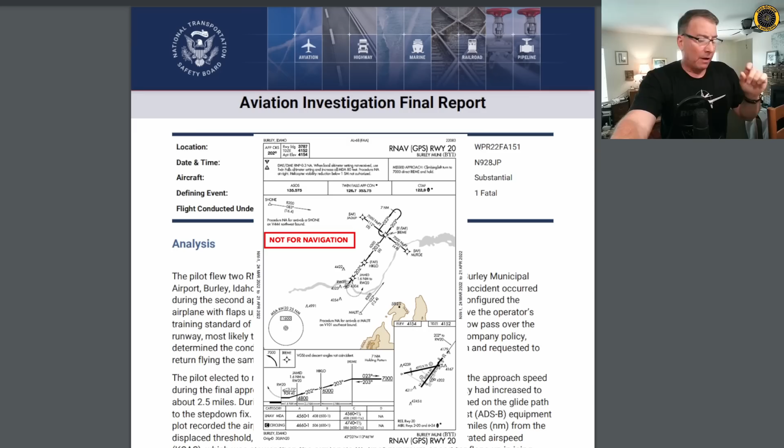The NTSB final report is out on the accident that killed Brittany Infinger, the solo pilot on board her cargo Cessna 208 Caravan aircraft, while attempting the visual portion of the RNAV 20 instrument approach into runway 20 at Burley, Idaho. The accident occurred on short final to runway 20 across the Snake River in Heyburn, Idaho, where Brittany impacted one of the stacks located here on top of the Gem State processing plant, just some 2,600 feet short of the displaced threshold on runway 20.

As viewed from the final approach, these stacks are located directly on final to runway 20, and the agglomerator stack that Brittany hit is located right here. These stacks emit huge plumes of very hot steam throughout the day while processing potatoes.

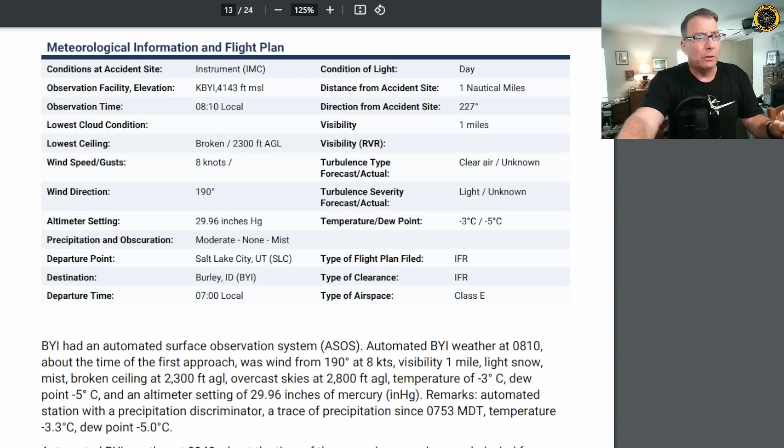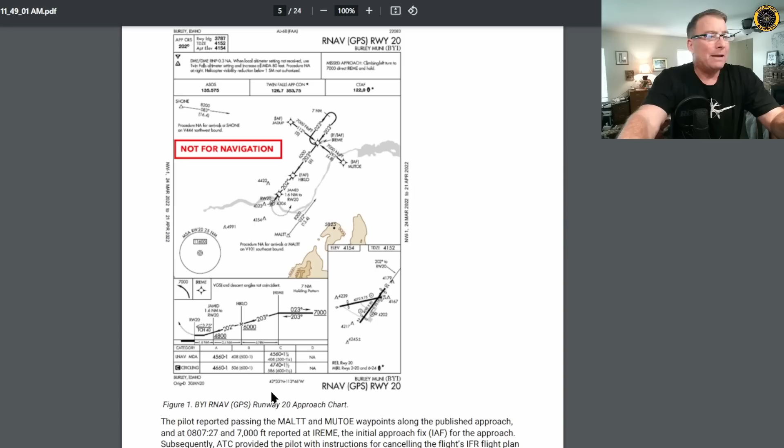At the time of the accident, the ASOS at Burley reported the winds 210 at 8, pretty much right down the runway. Visibility had improved from 1 mile to 2.5 miles of visibility, light snow with a broken ceiling at 3,000 feet AGL. A temperature dew point spread of only 3 degrees. The RNAV 20 instrument approach procedure has a required minimum weather of just 1 mile visibility for the category of Brittany's aircraft and an LNAV MDA, minimum descent altitude, of 4,560 feet.

Surveillance video of the crash indicates the light snowing conditions and the steam billowing heavily out of the stacks located just forward of Brittany's line of sight of runway 20. And it appears that Brittany pops out of the bottom of the steam cloud in a nose-high, flaps-up condition and is attempting to power up and out of the situation that she's in.

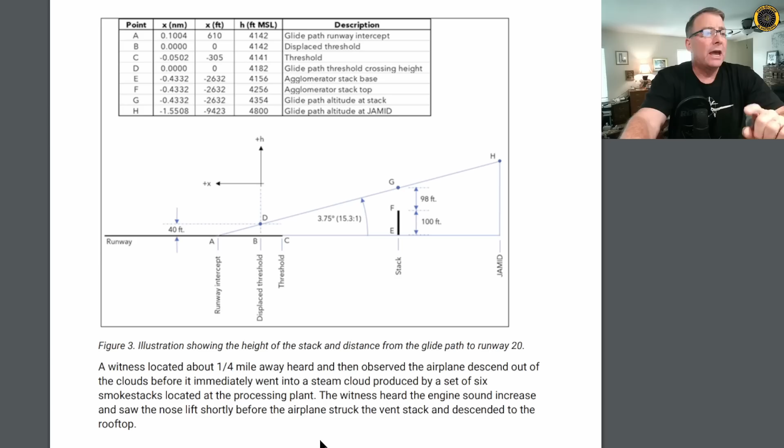A witness located about 1/4 mile away heard and then observed the airplane descend out of the clouds before it immediately went into a steam cloud produced by a set of 6 smokestacks located at the processing plant. The witness heard the engine sound increase and saw the nose lift shortly before the airplane struck the vent stack and descended to the rooftop.

An eyewitness video taken shortly after the crash shows the weather conditions and the conditions of the steam at the time, with the steam still billowing out of the 6 stacks proceeding downwind, and in this video, even obscuring the tower that Brittany hit.

The aircraft was a 2013 Cessna 208B with 5,116 hours. This was a Part 135 cargo flight, registered owner Spirit Air, operator Gem Air LLC, November 928 Juliet Papa. With the certified max gross weight of 8,785 pounds, powered by the PT-6A, the NTSB found that the aircraft cargo load was within limits, both within the center of gravity limits and within the weight limits for the aircraft.

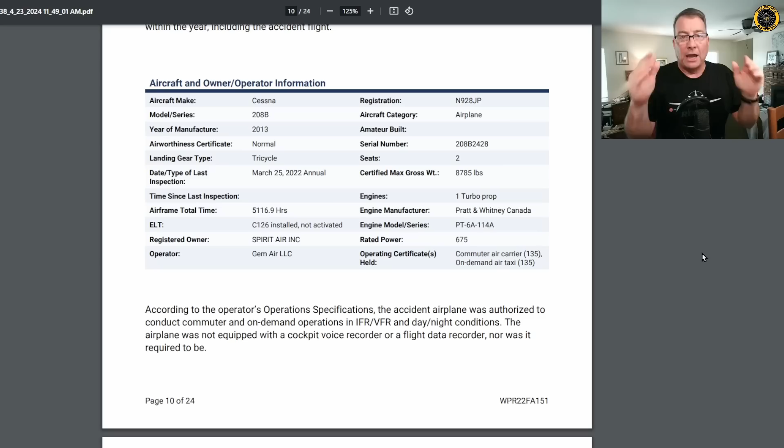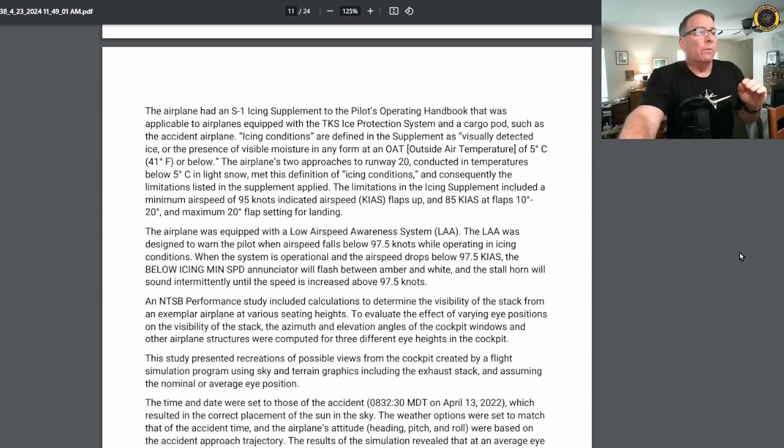The aircraft was equipped with known icing protection and had a low airspeed awareness system that would alert the pilot anytime the airspeed fell below 97.5 knots in icing conditions.

Brittany elected to fly this approach in a no-flap configuration to minimize the impact of icing, and according to the NTSB study, with the nose high attitude at the steep 3.75 degree glide path angle, and though Brittany had no problem seeing over the instrument panel, this may very well have been the picture presented to the pilot, where with the nose high attitude of the no flap condition at that airspeed, nearly 90 knots, the instrument panel may very well have obscured the stacks themselves while landing on runway 20 doing the visual portion of the RNAV approach.

So this was Brittany's second approach into Burley, and it is common practice. She flew an initial approach into Burley just to assess the conditions. So she broke out and did a very low approach down the runway at Burley because the runway was covered with a little bit of snow, and she wanted to make sure that it wasn't covered with so much snow that she could not land on there.

And one of the things they consider also in this operation is if it's currently snowing at Burley and they land there and unload the cargo, they may very well be stuck there for the time being or for the day, because there's no way to de-ice the aircraft if the snow falls on the top of the wings of the aircraft and they need to de-ice the aircraft before they depart.

So Brittany does a successful approach and low approach, assesses the runway condition, and decides to go for it and makes the second approach into Burley. The second approach proceeds well.

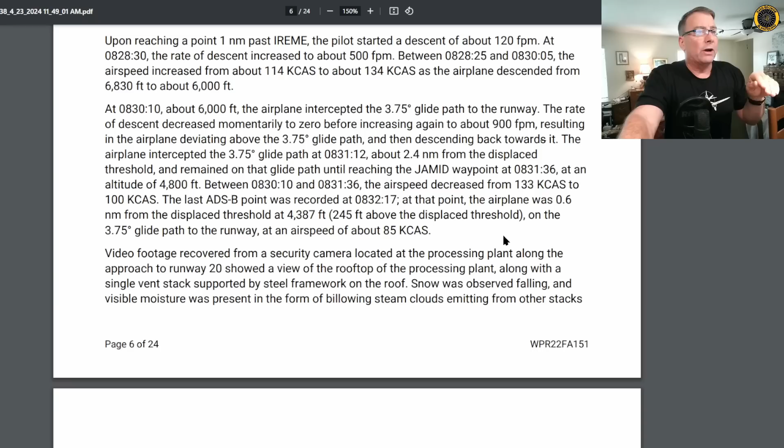So here on page 6 of 24, she slows the aircraft, again with a no-flap configuration, from 133 knots down to 100 knots calibrated airspeed. The last ADS-B point was recorded at 08:32:17. At that point, the airplane was 0.6 of a nautical mile from the displaced threshold at 4,387 feet, 245 feet above the displaced threshold. She's on the glide path to the runway at an airspeed now down to about 85 knots calibrated airspeed.

So here's some of the NTSB math behind this, what I would call a trap of an instrument approach of this obstacle, which apparently was approved by the FAA, but there's some going back and forth, and this is going to be all resolved in, well, there's going to be many lawsuits over this.

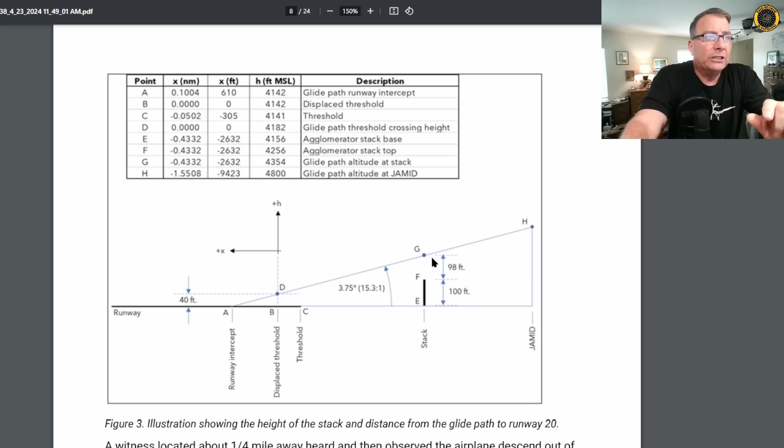So here's the stack, here's the displaced threshold. On a 3.75 degree glide path, you clear this stack, the stack that she hit, by just 98 feet. Note, this diagram is not exactly to scale.

So the big question is, how and why did Brittany get so low so quickly? Everything was going fine. There was nothing wrong with the airplane. There was technically nothing wrong with the instrument approach, according to the FAA, other than some of the painting on the stacks. Up until point J, there was a sudden loss of altitude from this altitude until the point of impact.

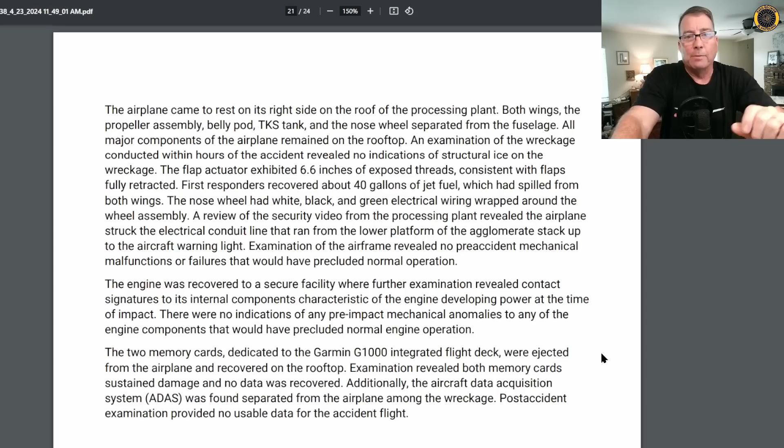They did find the red warning lights located on top of these steam stacks here, but unfortunately, the light to the agglomerate stack that Brittany hit was apparently stolen. The agglomerate stack was equipped with an aircraft warning light. However, the light was stolen before it could be examined by the NTSB. The Heyburn Police Department investigated the theft but was unable to recover the light.

According to the police report, an individual was found to have trespassed on the property of Gem State Processing after the accident. This individual later published a YouTube video where he reported to have taken the light from the accident site. When questioned further about the location of the light, the individual recanted and stated that he had essentially made the video for dramatic effect, and while he examined the light at the accident site, he claimed that he removed it from its conduit. He had not taken it away.

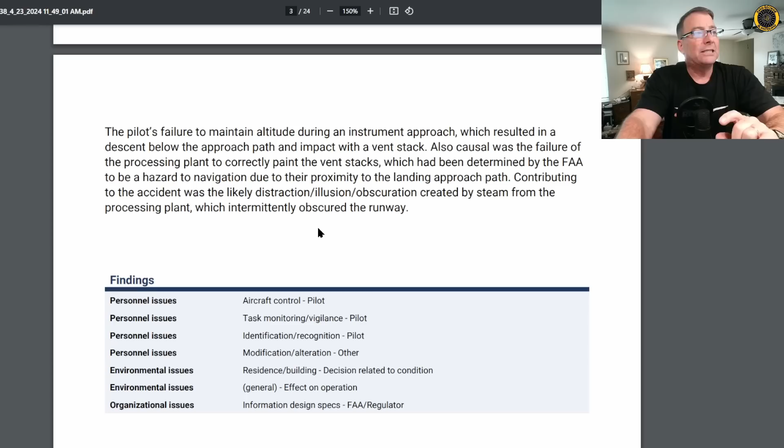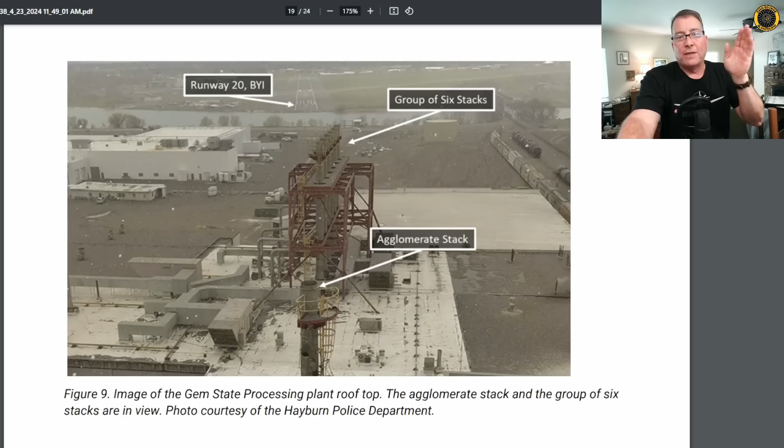Contributing to the accident was the likely distraction, illusion, or obscuration created by steam from the processing plant, which intermittently obscured the runway. Remember, once you are on the visual portion of an instrument approach, you are required to maintain the runway in sight at all times, and if that runway becomes obscured, you're required to do a go-around. Obviously, this is a terrible design of an instrument approach.

There's going to be a lot of fallout from this and lawsuits. It may very well be that this ends up closing the Burley airport and forcing the community of Burley to completely relocate the airport to a different location.

So what caused Brittany to get so low so quickly in the final 7 seconds prior to impact on this instrument approach? I suspect what happened is she went into the steam cloud. The steam clouds that emit from this plant are extremely hot. What happens to your density altitude is you enter warmer air. The air gets thinner. The air in this case is steam. It's 100% saturated air. And what happens to your density altitude in high humidities? It goes up.

So proceeding from the cold air of the instrument approach at a relatively slow speed and entering the steam cloud with a massive increase in density altitude, the air inside the steam cloud is much thinner than the surrounding air. The aircraft is going to lose performance. The wings are going to lose lift, and the engine is going to lose power. Less oxygen for that PT-6A engine to breathe. And even if Brittany was initiating a missed approach from this point, it might have trapped her, too much, too late, to power out of this situation.

Coupled with all the other holes in the Swiss cheese, the limited visibility from the snowing conditions, the angle of the instrument panel at the flaps up condition of the aircraft, potentially obscuring the views of the stacks until the last few seconds of the flight, it just all adds up to disaster. This is a terrible trap of an instrument approach design into the Burley airport. Brittany was familiar with it, but on this last run, this trap claimed her life.